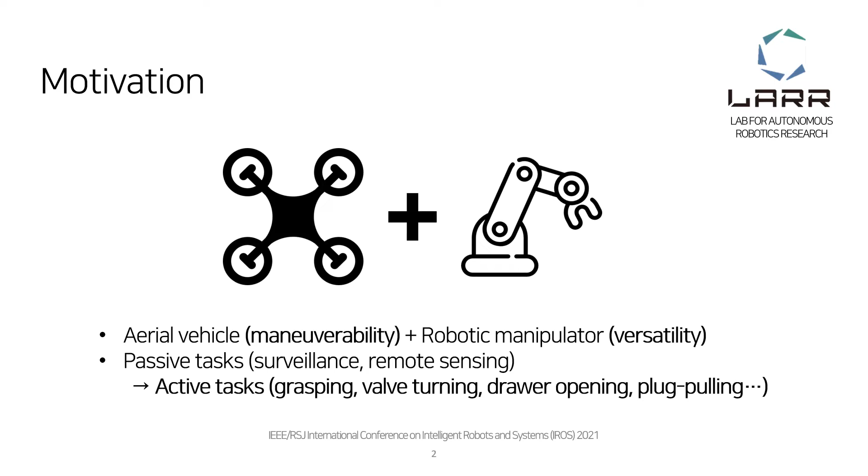Among those active tasks, I focused on plug pulling using the aerial manipulator, because the large force exerted on the end-effector disappears and necessarily induces an abrupt change in the dynamic model. From this perspective, I thought there needs to be an elaborate analysis on the stability and robustness of the aerial manipulator conducting plug-pulling tasks using the concept of hybrid automata.

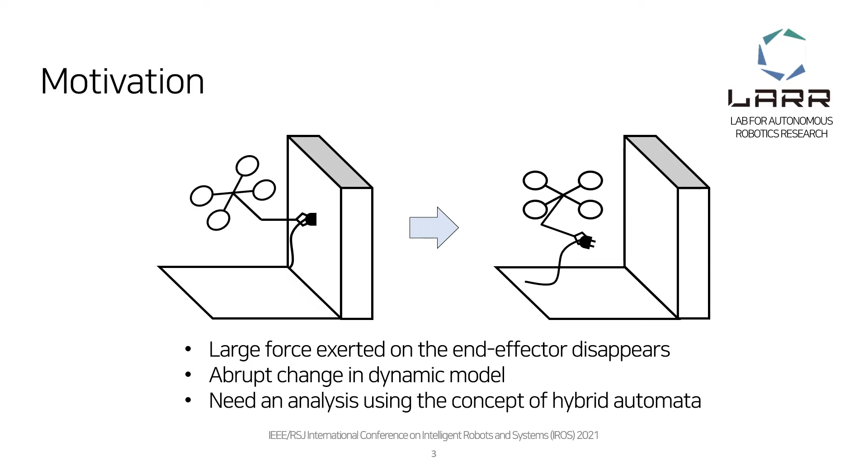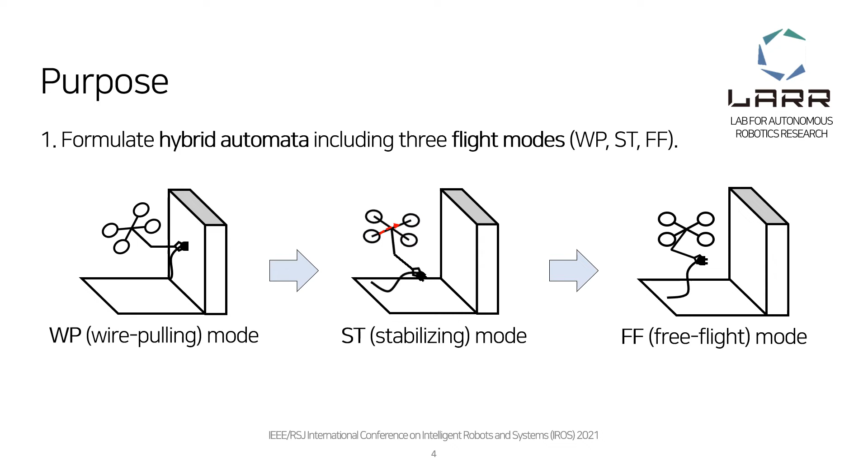So, the purpose of our research analysis follows. First, we aim to formulate hybrid automata including three flight modes which consist of wire pulling, stabilizing, and free flight modes. Also, we plan to design trajectory generation strategies and corresponding disturbance observer-based controllers for the respective flight modes, and prove the stability and robustness of the aerial manipulator with the proposed controller.

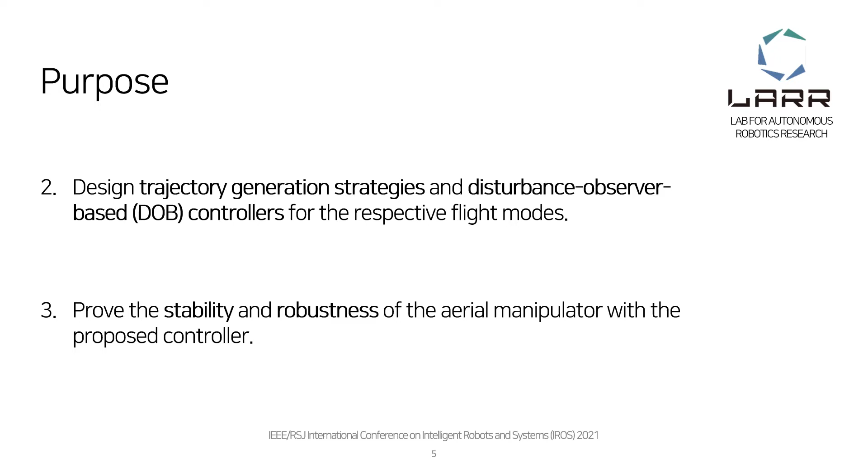In addition, we arranged related work to highlight the necessity of our research. For the aerial vehicle involved in physical interaction, these three works arranged the dynamics using the concept of hybrid automata. However, they didn't prove the stability and robustness during the flight mode transition, and the change of flight mode did not induce an abrupt change of dynamics like the plug-pulling operation.

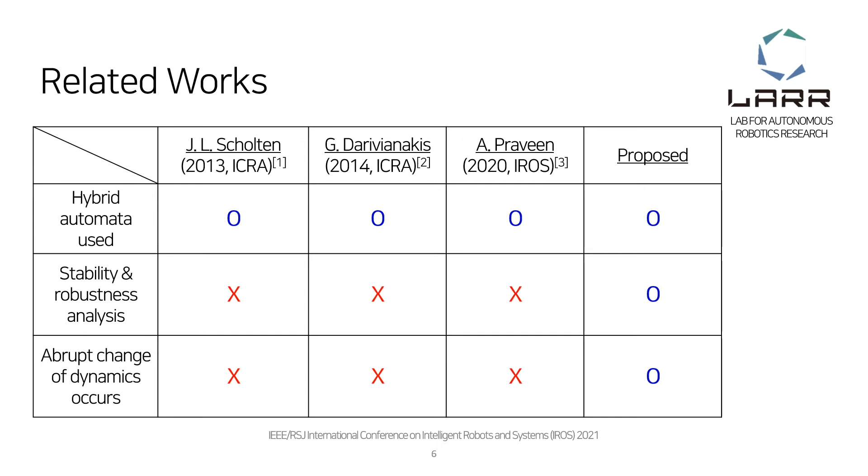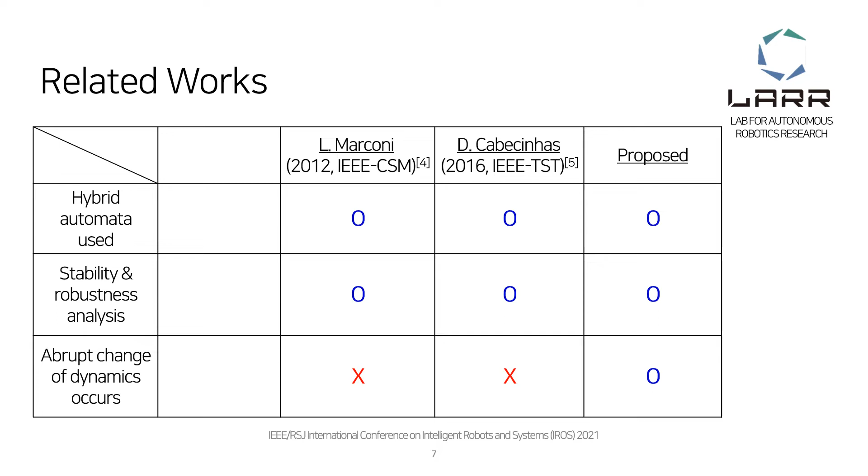On the other hand, these two works also arranged the dynamics using the concept of hybrid automata and conducted stability and robustness analysis. However, the change of flight mode still does not induce an abrupt change of dynamics, because they only dealt with tasks which only entail a small amount of dynamics change, such as wall contact or landing on an inclined surface. Those tasks can reduce the degree of dynamics transition by approaching with small velocities.

Compared to the related works, there are some contributions of our work. First, to the best of the author's knowledge, it is the first time to conduct a plug-pulling task which necessarily induces an abrupt change in dynamics after the plug separation. Also, we present a thorough analysis on the stability and robustness, and design a disturbance observer-based controller for the wire pulling mode based on the dynamic model of the aerial manipulator, which is constrained to the wire and the socket.

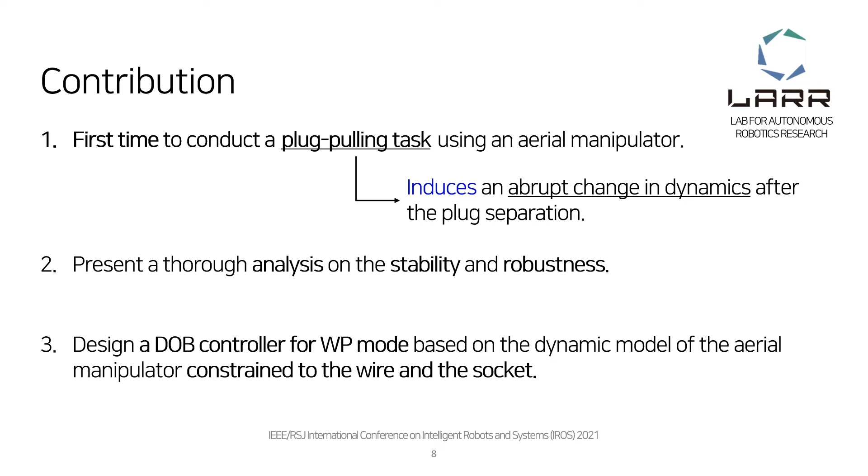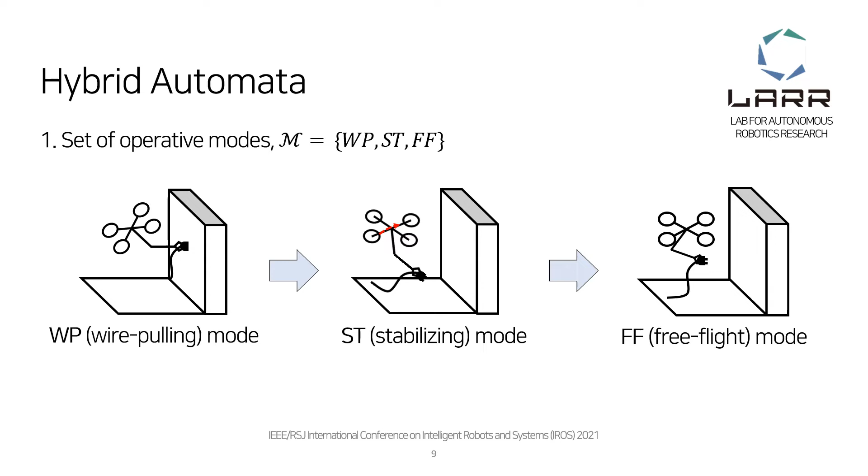From now on, let's take a look at the method part. First, I'm going to talk about the hybrid automata of the aerial plug-pulling vehicle. The plug-pulling aerial manipulator consists of three operative modes. The first is the wire pulling mode, which tilts its body to pull the plug out of the socket. The second is the stabilizing mode, which rapidly brings the attitude of the multirotor to the hovering state. The final one is the free flight mode, which demonstrates the freely flying aerial manipulator.

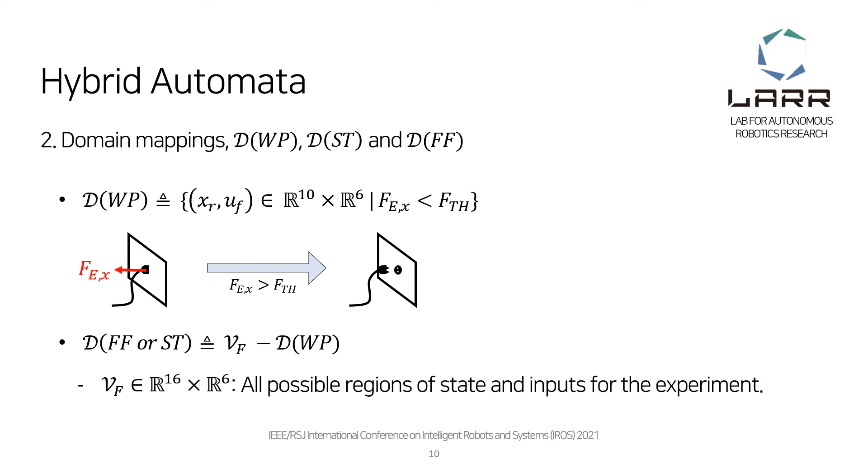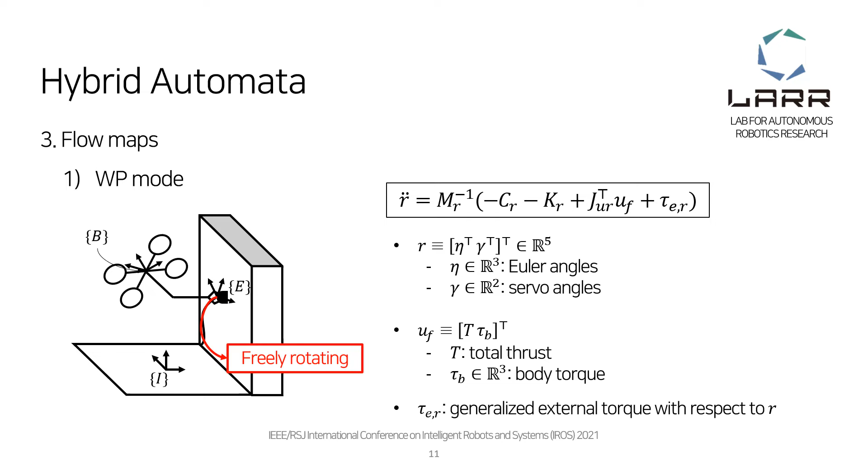The flow maps, which describe the dynamics for each operative mode, are analyzed as follows. For the wire pulling mode, we derive the dynamics using the fact that the end effector is constrained to a fixed point while it can freely rotate with respect to that point. So the generalized coordinate for this mode, R, can be expressed as the collection of Euler and servo angles. Also, if we set the control input UF as the combination of total thrust and body torque, it can be used as a general expression of the control input later on.

For the stabilizing and free flight modes, we can easily derive the dynamics of the aerial manipulator using the Euler-Lagrange equation. For these two modes, the generalized coordinate consists of the position, Euler angles, and servo angles.

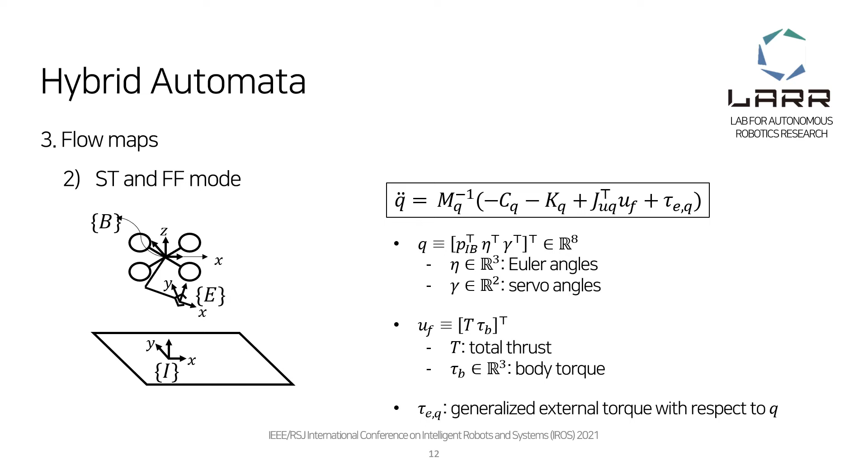The Guard mappings, which mean the condition for mode transition, are also arranged as follows. As seen in the previous slides, the mode change to stabilizing from wire pulling occurs when the interaction force on the end effector exceeds its threshold value. So technically, the Guard mapping from wire pulling to stabilizing mode is formulated as shown in the box.

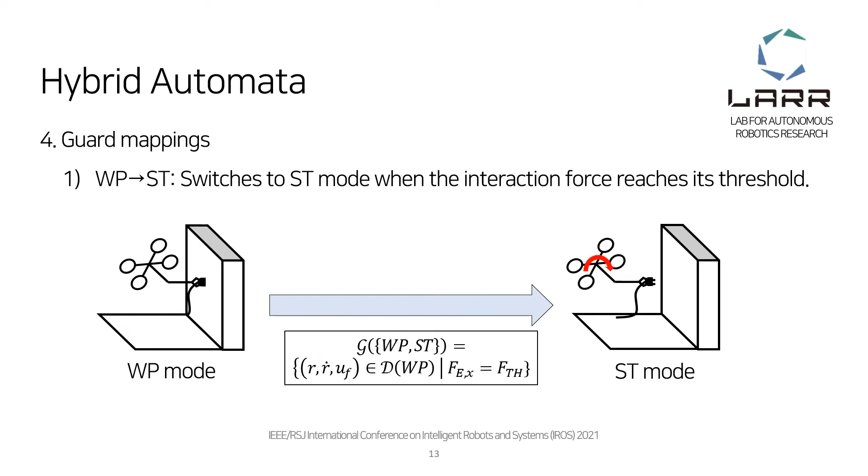Also, since the difference between stabilizing and free flight mode is the way of controlling the vehicle, there are some conditions under which the operative mode change occurs. As the name stabilizing suggests, the mode change to free flight occurs when the attitude values become close to zero and after a certain time period. This also helps avoid undesirable mode changes, such as a direct transition from wire pulling to free flight mode, which can be prevented.

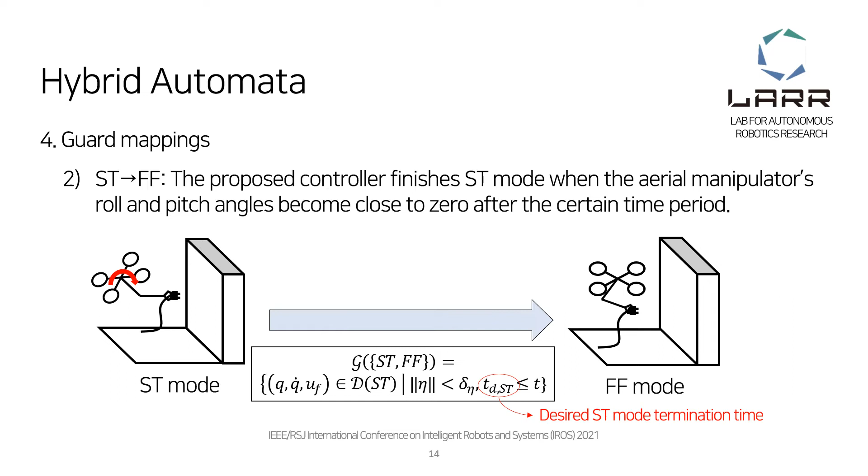For the last part of the hybrid automata, the reset maps, which mean the change of state values before and after the mode transition, are arranged as follows. When the operative mode changes to the stabilizing mode from wire pulling mode, the speed of the end effector becomes non-zero when the plug is separated from the socket. Thus, the formal set expression of this mode transition is formulated as shown in the box.

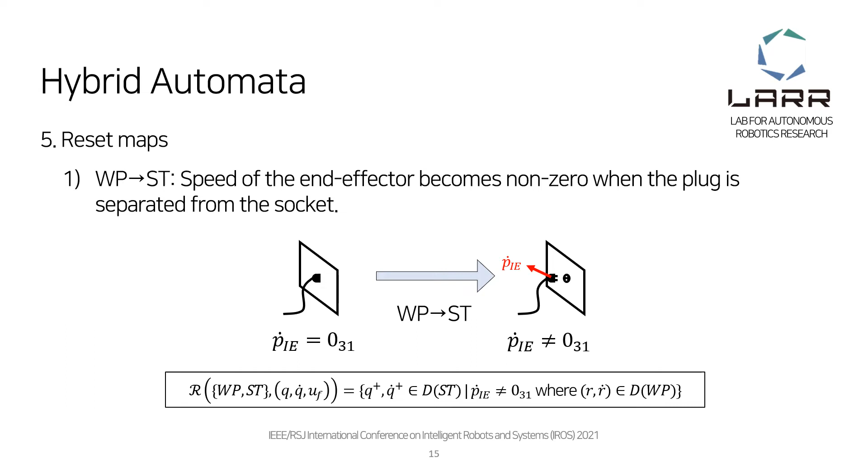However, for the transition from stabilizing to free flight mode, since there is no discrete state jump in states Q and Q dots, the reset map is derived as follows.

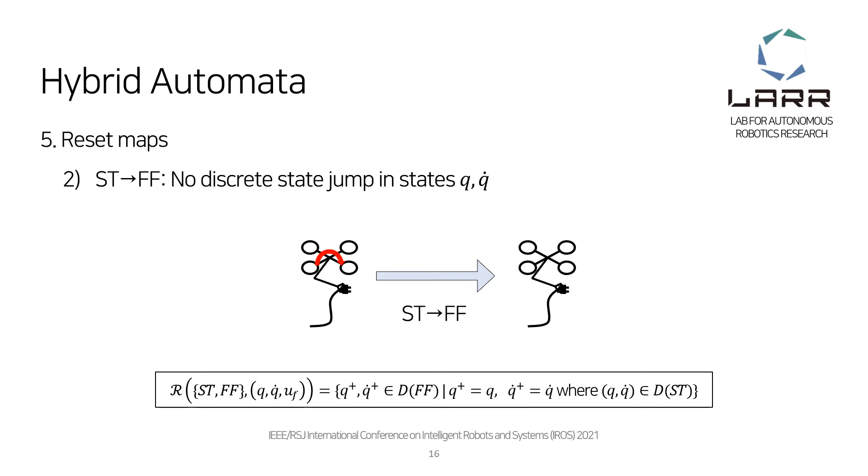Next, I will talk about our trajectory generation strategy. The main point of our trajectory is continuity. To fulfill the criteria of the given controller, we try to maintain the continuity of the reference trajectory.

For wirepulling mode, the reference makes the multirotor slightly tilt its body toward the pulling direction. The reference point becomes constant when the multirotor reaches its maximum pitch angle theta m.

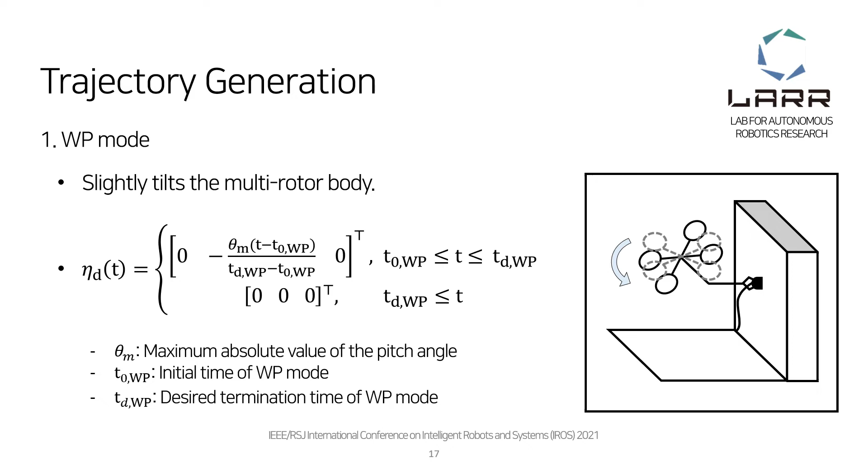After the plug separation, a rapid trajectory for attitude stabilization is generated, as shown in those figures. In a short period between T0st and TDst, the desired pitch angle rapidly goes up to zero, while the reference point of the altitude remains the same as its value at the initial time of stabilizing mode.

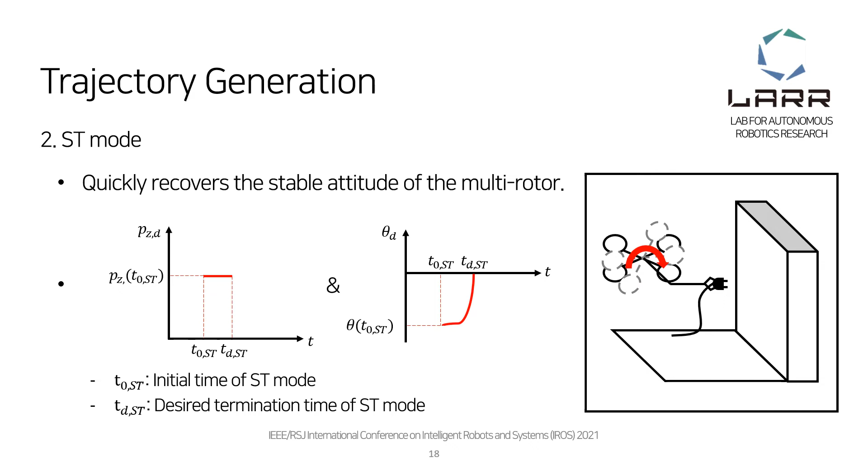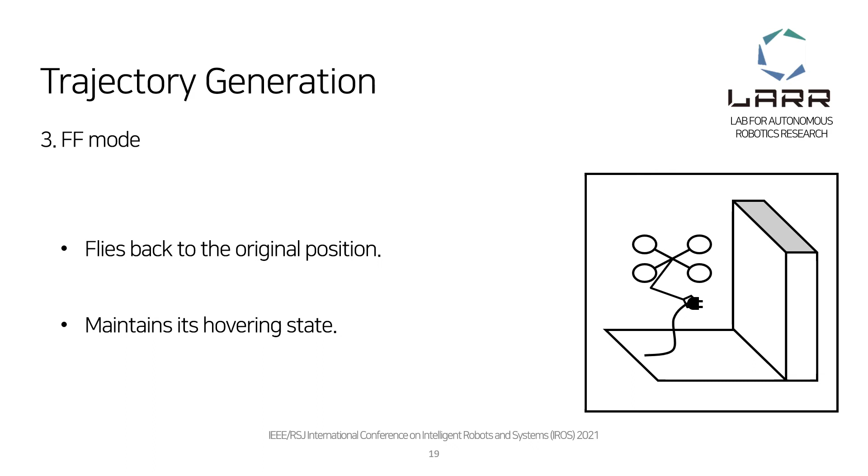When the free flight mode is reached, it simply holds its position and maintains its hovering state. Also, the controller is derived according to its operative mode.

For the wirepulling mode, to get the body torque input, we first formulate the nominal model of the wirepulling dynamics as follows.

In these equations, M eta, C eta, K eta, and J eta are block matrices from MR, CR, KR, and JUR, while the bar sign means the nominal values, which consist of the measured mass, measured length, and measured moment of inertia.

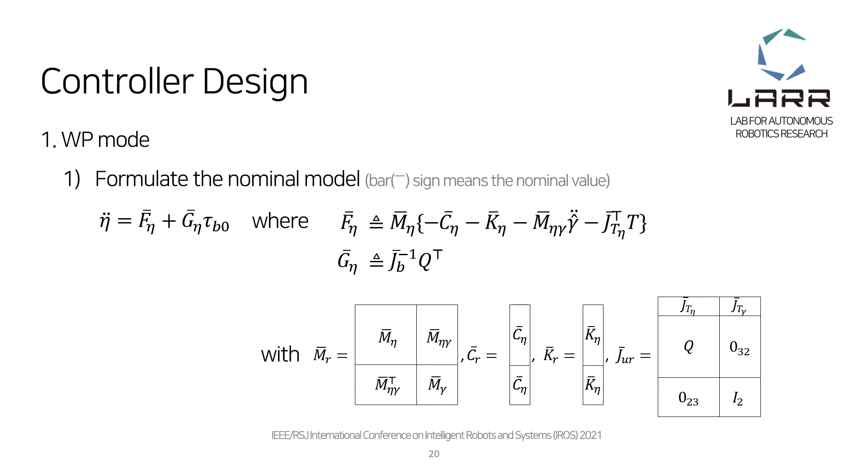Also, the hash sign means the estimated value from the Kalman filter. From the nominal control input tau b0, which makes the nominal model asymptotically stable, we can get the body torque tau b by the proposed disturbance observer structure shown below.

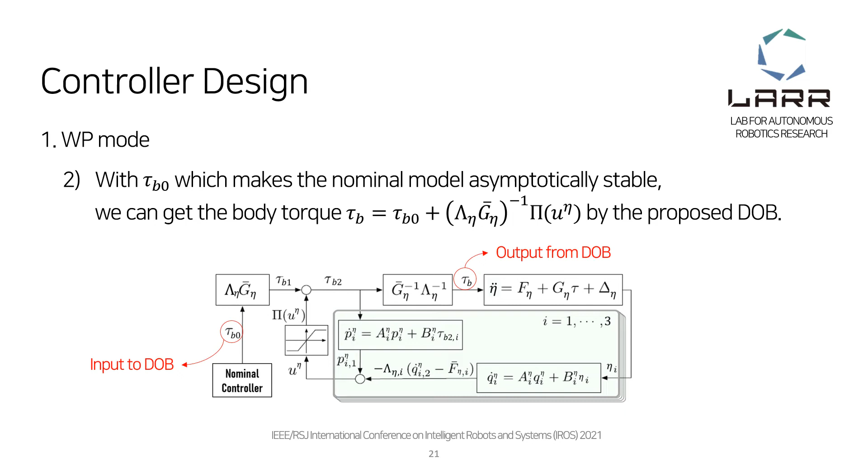For the stabilizing and free flight mode, we use controllers from reference papers 6 and 7. For the stabilizing mode, we turn off the controller for the under-actuated part and generate the reference trajectory of altitude and all angles following the trajectory generation strategies mentioned before.

However, for the free flight mode, we turn on the whole controllers and try to maintain the multirotor's hovering state.

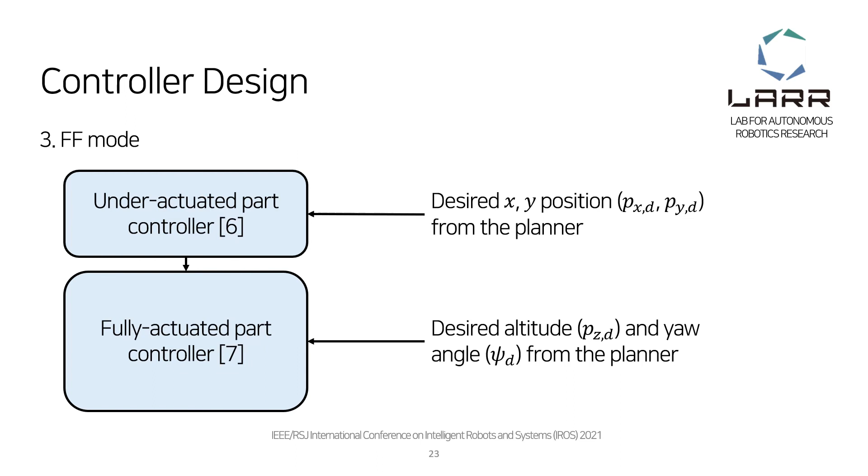For the last part of our method section, I will briefly introduce the procedure of stability and robustness analysis. First, we proved the robustness of the nominal maneuver, including flight mode transitions.

To show the robustness of the nominal maneuver, there are two conditions. First, the desired mode transition from wirepulling to stabilizing mode should be accomplished while the undesired mode transition from wirepulling to free flight mode doesn't occur.

From the detailed analysis of our scenario, we found that the trajectory with our proposed trajectory generation strategies guarantees the mode transition from wirepulling to stabilizing mode, while the transition to free flight mode never occurs.

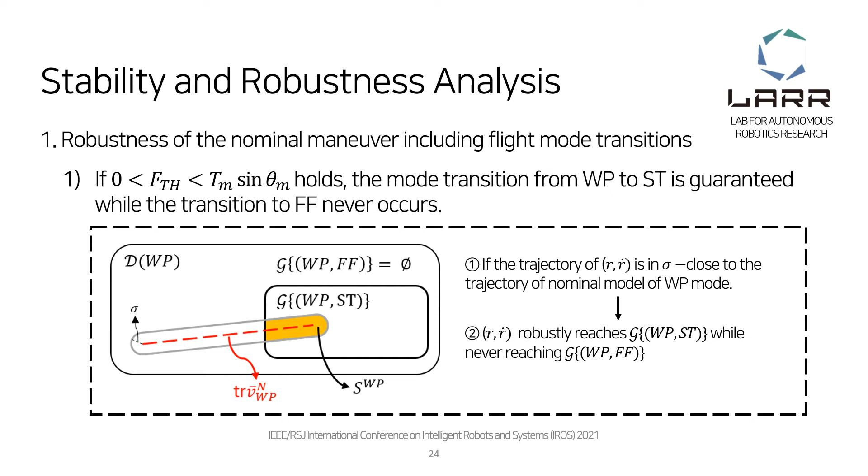The second condition is that the undesired mode transition must not occur after the mode transition and state jump. From the reset map definition from stabilizing to free flight mode, there exists a temporal limit so that the direct mode change from stabilizing to free flight mode can be prevented.

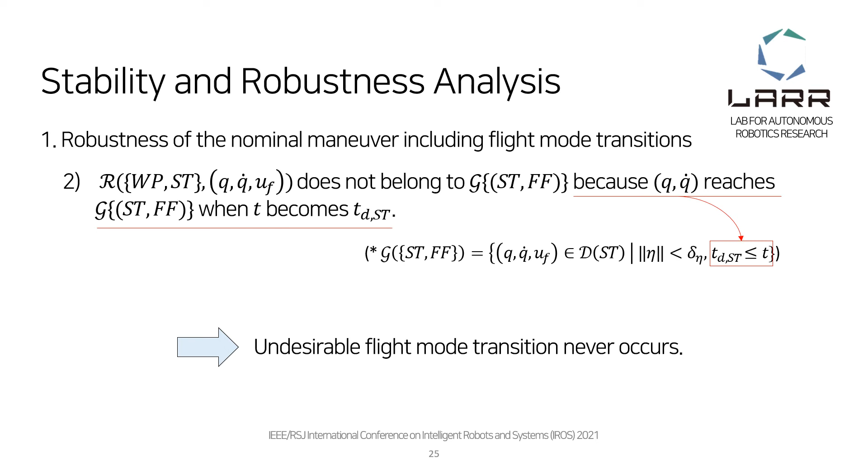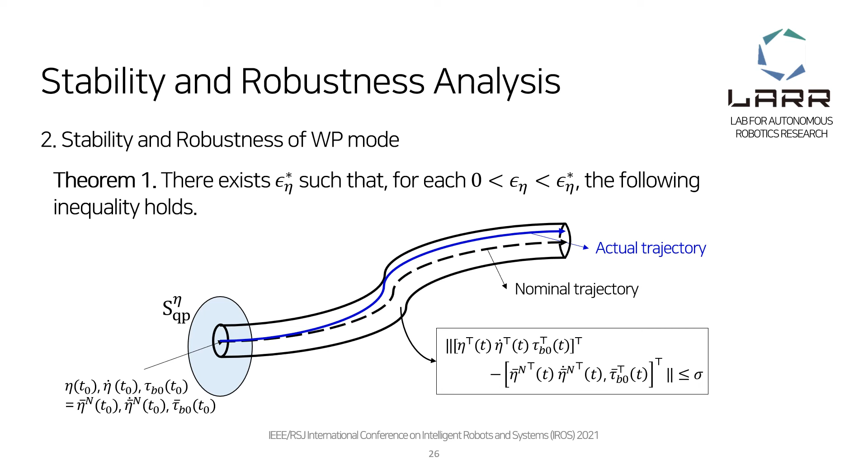While the stability proof of stabilizing and free flight mode are done in references 6 and 7, we proved theorem 1 shown in the previous slide.

First, we formulate the standard singular perturbation form with respect to psi and zeta, which are functions of p and q values, and we prove that the boundary layer system of psi and zeta is exponentially stable. Finally, we use Tikhonov's theorem to prove that the closed-loop system of wirepulling mode is ultimately bounded.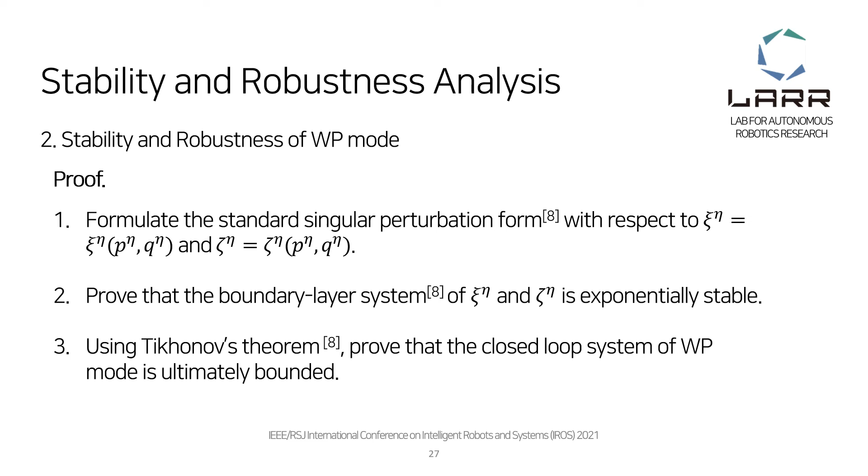As I mentioned before, the stability and robustness of the stabilizing and free flight mode are proved in 6 and 7.

Lastly, I will show you the experimental results. With our aerial manipulator and robotic manipulator, the plug plugged into this socket was pulled out.

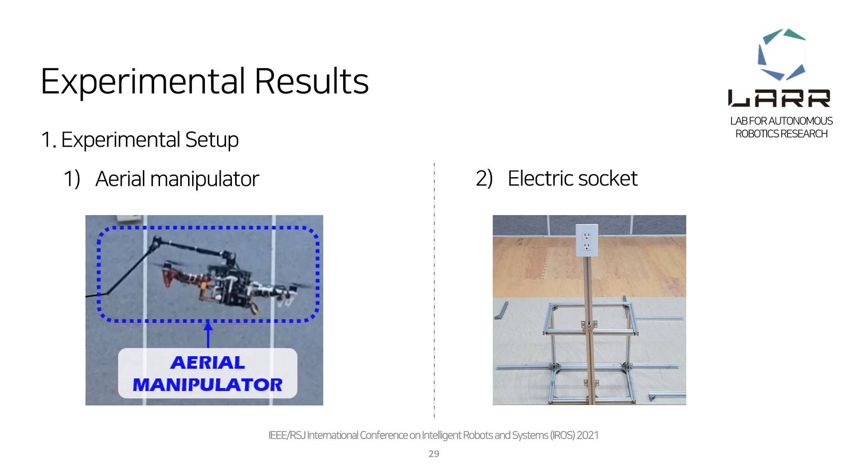I conducted the experiment with a long wire because the focus of our paper is to show the process of plug-pulling and stability recovery after the operative mode transition, rather than approaching the socket.

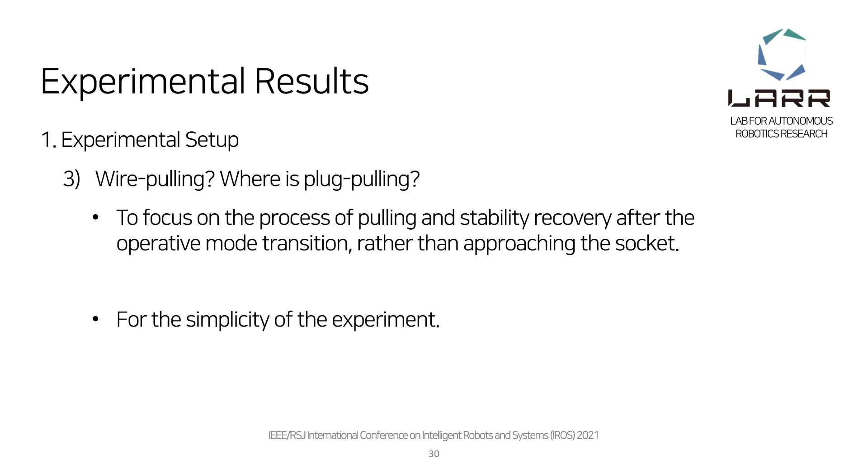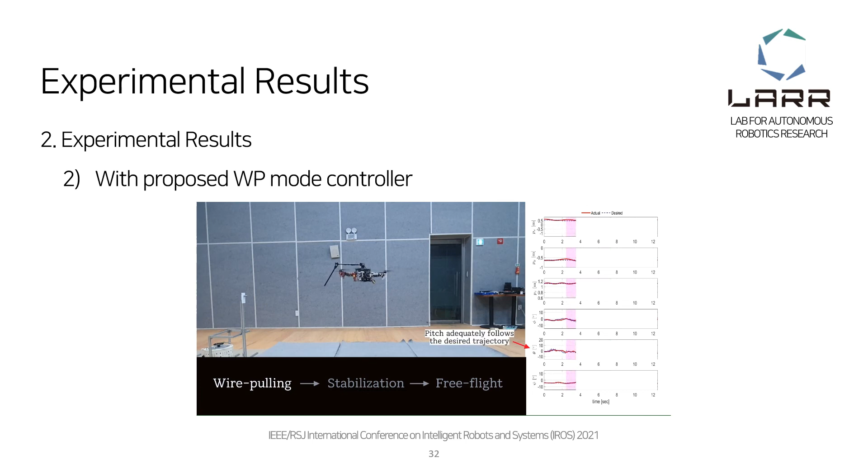However, if we use the proposed controller and trajectory generation strategies, and if you closely look at the plot of pitch angle, it is shown that the controller was working well.

To summarize, the concept of hybrid automata is used to demonstrate the aerial plug-pulling with 3 operative modes, and the trajectory generation strategies and disturbance observer-based controllers for each operative mode are also formulated.

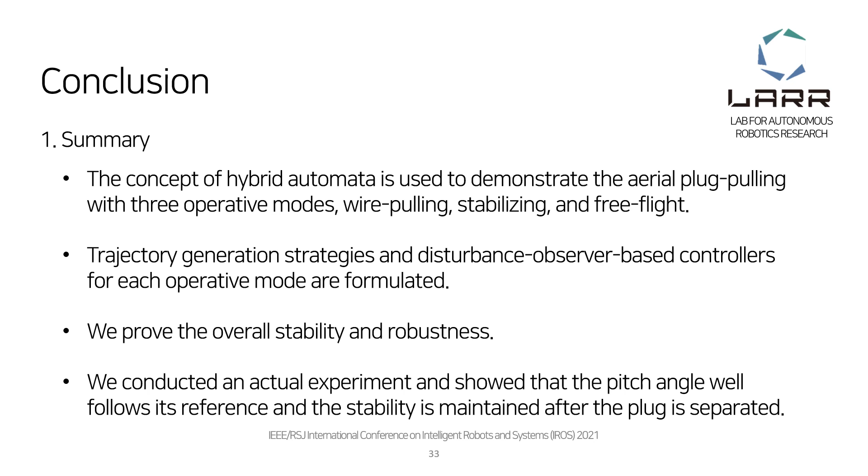In addition, we proved the overall stability and robustness, and we conducted an actual experiment showing that the pitch angle well follows its reference and the stability is maintained after the plug is separated.

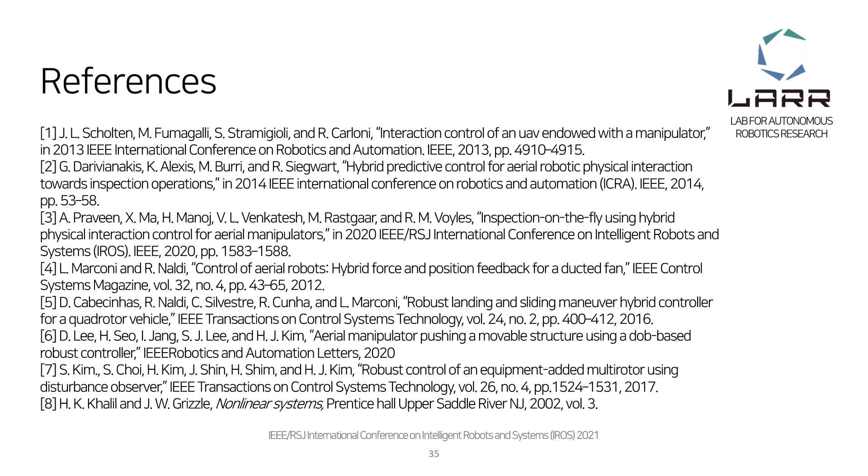For future work, autonomous grasping of a plug with an aerial manipulator can be included in the experiment. These are the reference papers I used in this video, and this is the end of my presentation.